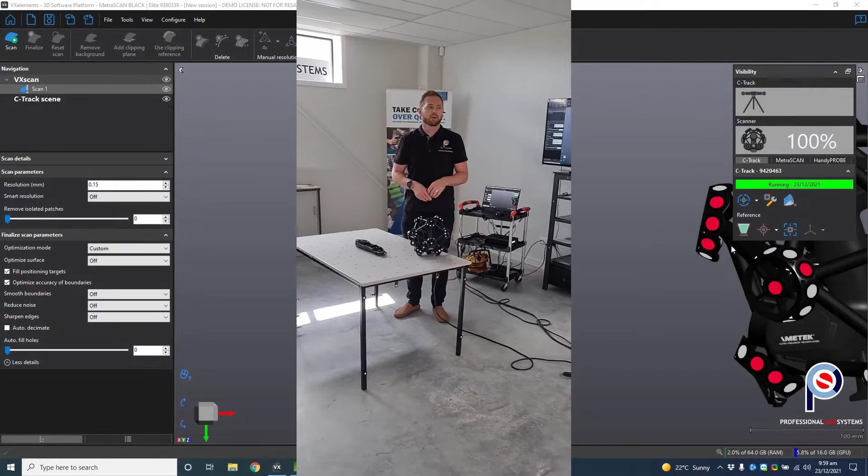Today we're going to show you how to reverse engineer this motorcycle part. It's a very complex shape, nearly impossible to measure with traditional measuring techniques. So we've got Creaform's MetraSCAN, and we're going to show you how to get up and running.

The first thing I need to do before we get started is acquire the targets that I've put on the table, and that will ensure that if this table moves in any way, it's tracking the movement of the part. So we go out into the software.

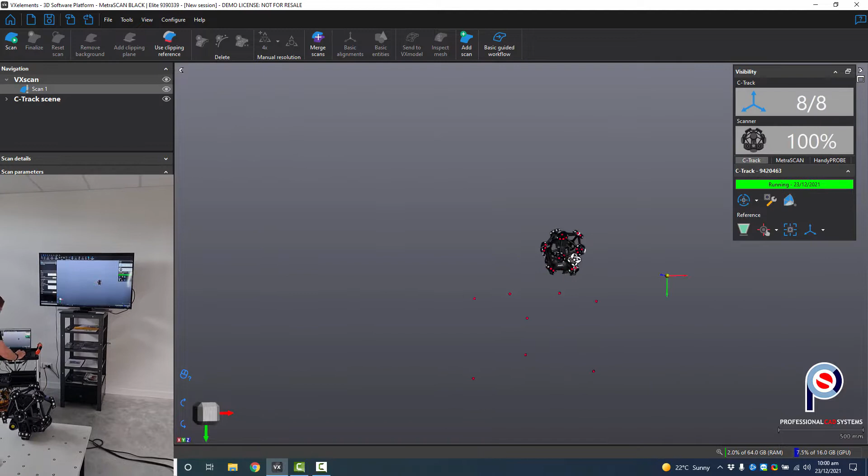I can go and select manual detect, and I just simply drag a selection around those targets and accept it. You can see it's already registered the targets, they're in red. It's already tracking the MetraSCAN. You can see it on the picture. The C-Track's taking track of that.

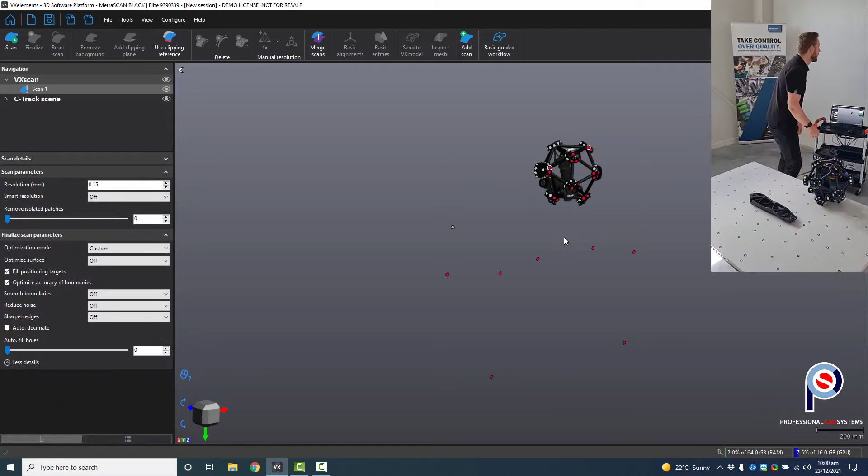So then next what I need to do is determine what resolution I need to use to capture the part. I can go over to the left hand side and change the resolution, maybe to about 0.8.

What's cool with our software is that we can also adjust some settings before even getting started. So I can click on auto decimate, and we'll put large triangles in the large surface areas and keep small triangles in the small or the high detailed areas.

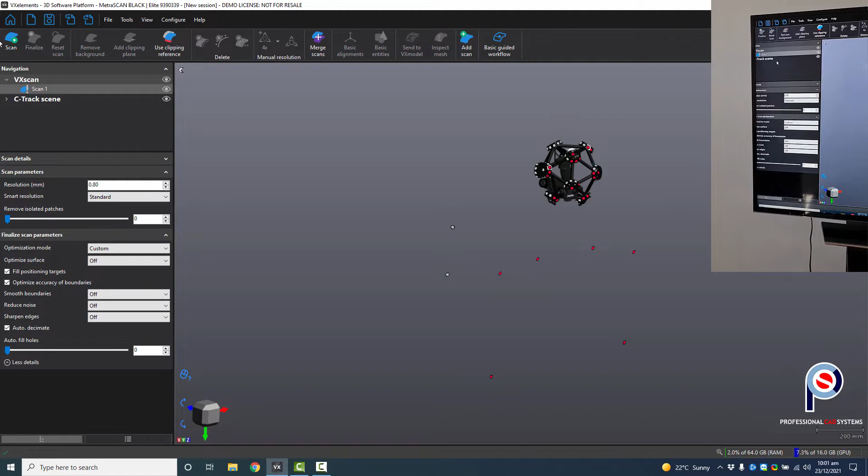We also have a thing called smart resolution. What it will do is just put small triangles on the high detailed areas and use bigger triangles in the larger surface areas. So next what I'm going to do is hit scan.

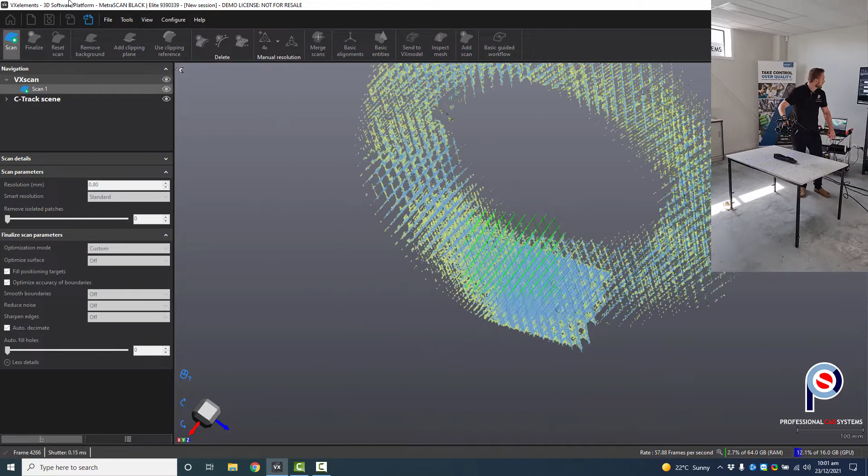Cool. Then I just need to capture a little bit of the table because I basically want to remove that. So just simply scan a bit of that, just enough so I can create a clipping plane.

So next I can go add a clipping plane and just delete that out, because I just don't need it.

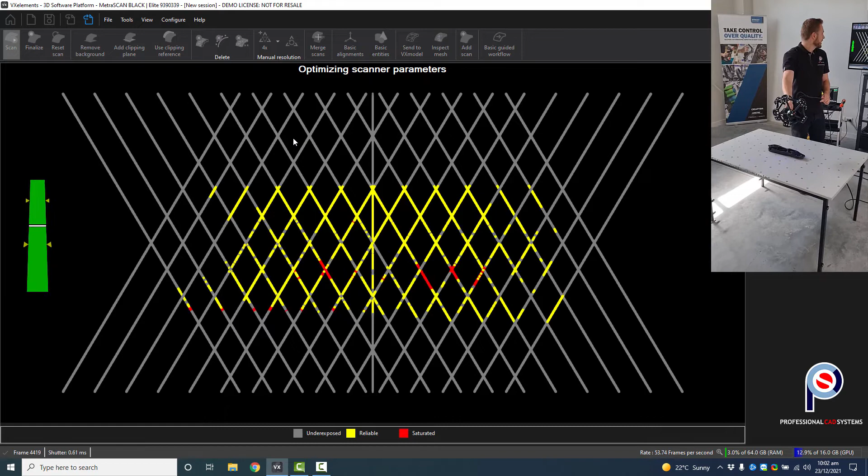The next step is I need to adjust my shutter speed for the laser strength for the part. I've got these multi-function buttons on the back of the scanner. I can hold the tick down, scroll down to auto adjust, accept that, aim it at the object, and it will automatically adjust to suit. Once it's done, it will exit.

So at this point, I'm ready to start scanning. I can hold the trigger down on the front of it. That will start the session. And then tap one more time, and we'll start to collect it.

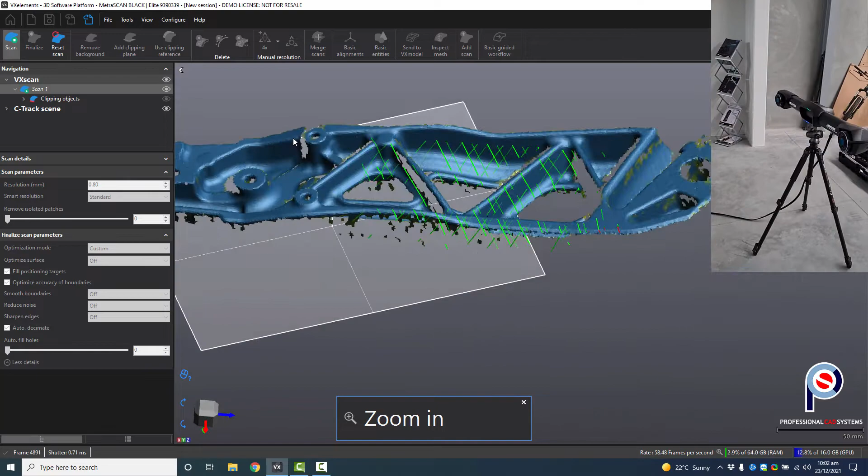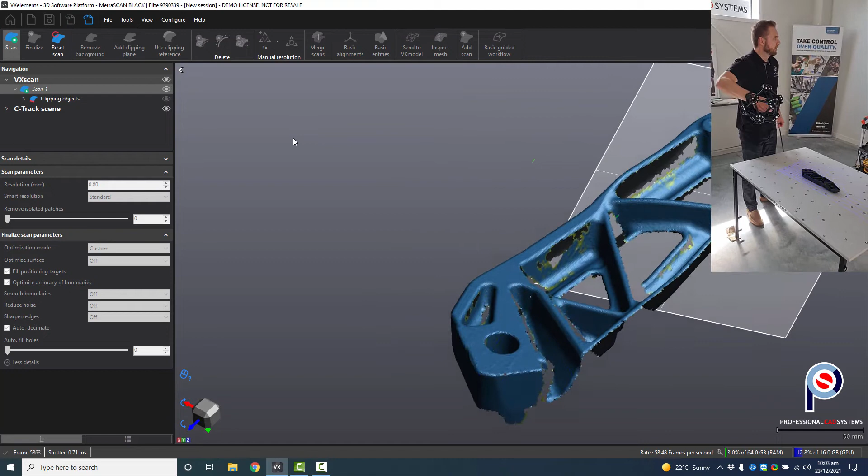It's just like 3D spray painting. As I go over and over it, it just keeps filling in the gaps. What's quite nice is it has a distance meter on the lasers on the screen. So if I get too close, it will go red. Too far away, it will go blue. So you're just aiming to be in the green zone.

But it's a very fast scanner. You can just sweep over and over the part as many times as you like, and it will only ever create a single surface.

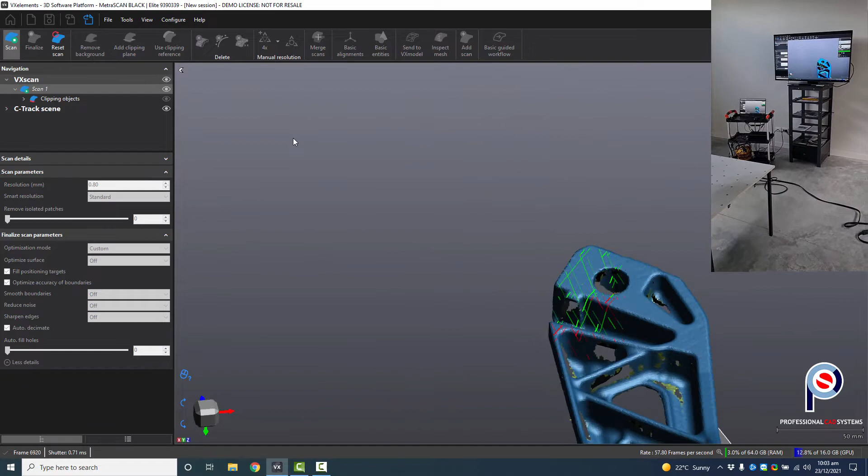If your laser strength isn't quite enough, you can toggle between zooming in and shutter speed. So I can just increase that a little bit more. Then I should be able to capture the surfaces a bit easier now. That's better.

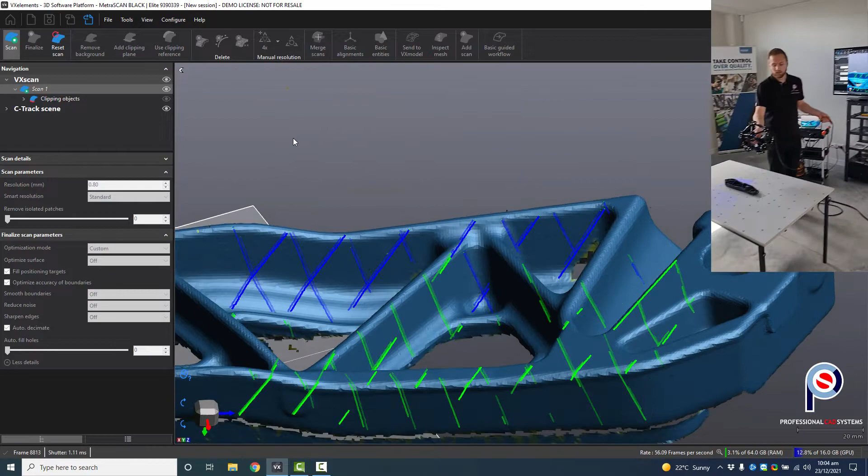So we'll just go around, make sure we haven't missed anywhere. What's also quite nice with the Black Elite model is that we get a single laser. So if I double tap the trigger, it'll go down to a single line, and it just makes it a little bit easier getting into those hard to reach areas.

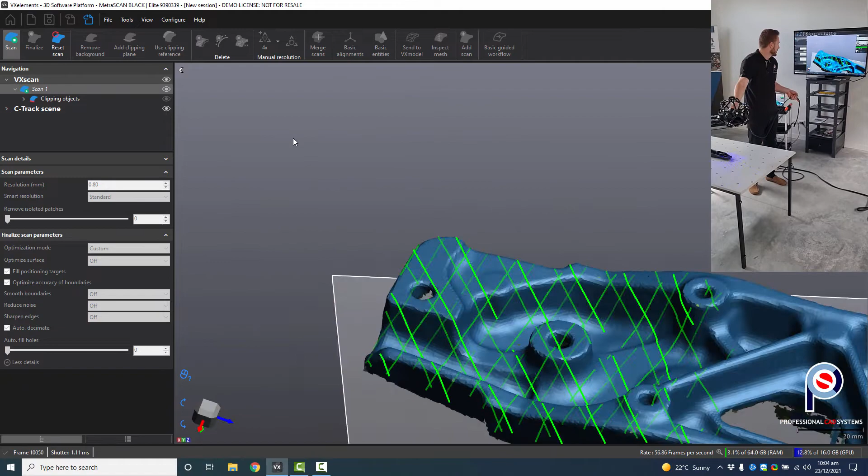Plug in there, you can just flick back to the other laser mode.

Okay, so that's one half done. We can hold the trigger down and press stop.

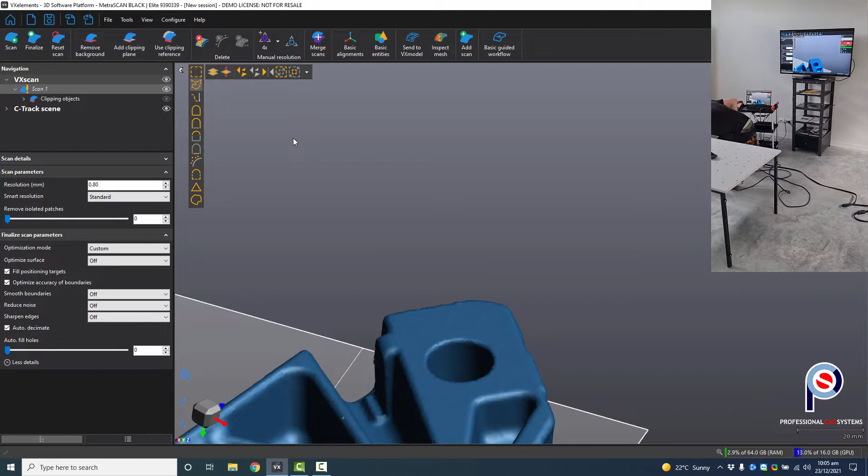Then what you need to do to add the second half is we just click on add a scan, and we can copy the clipping objects. So we'll copy that clipping plane that we created, and then we can use that. It also copies the mesh, so I might delete that.

Hit scan again, and now we just need to turn the part over. Okay, so when you're ready to scan the other half, again you just hold the trigger down, tap the trigger one more time, and just start scanning again.

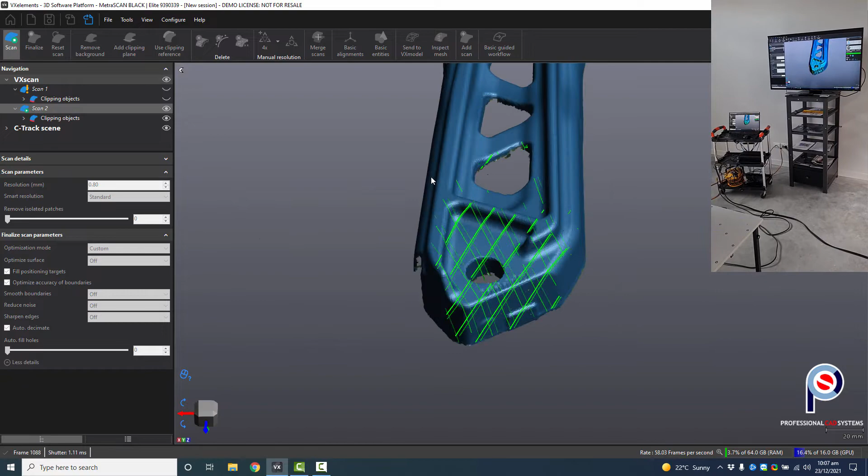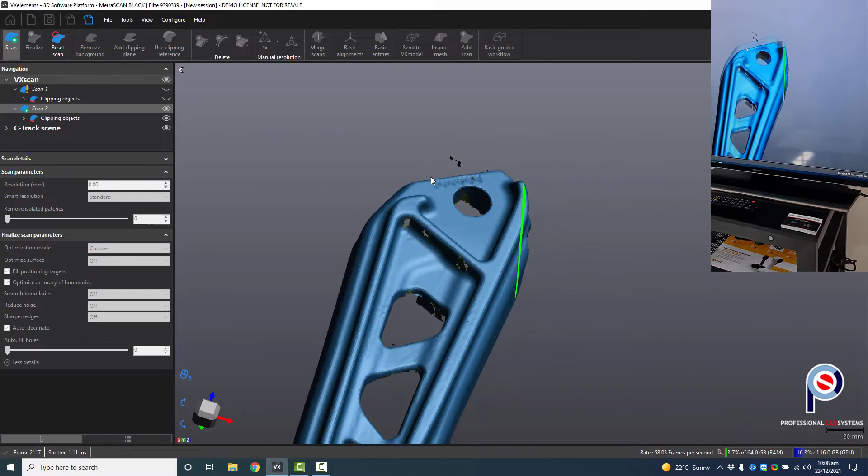And again, I can double tap the trigger just to get into the hard to reach areas. It just gets deep into the holes. So basically it switches to a single lens when you go to the single laser mode.

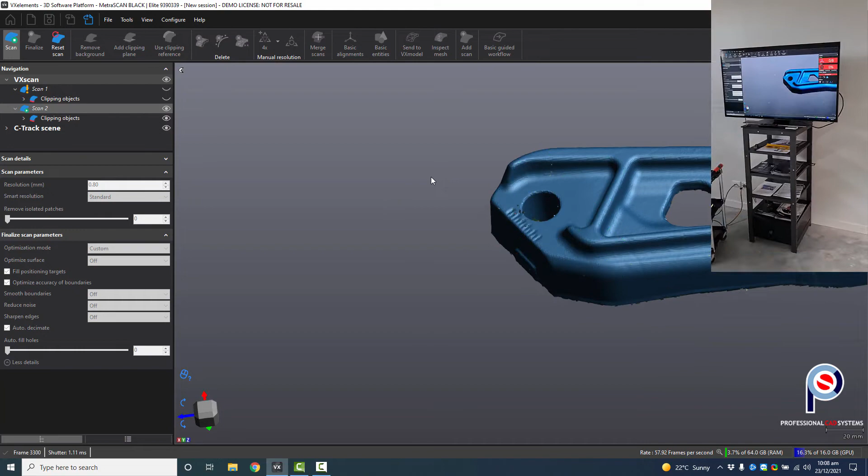Good. So once you're done, you just hold the trigger again, stop the scan, and now we can look at merging the two scans together.

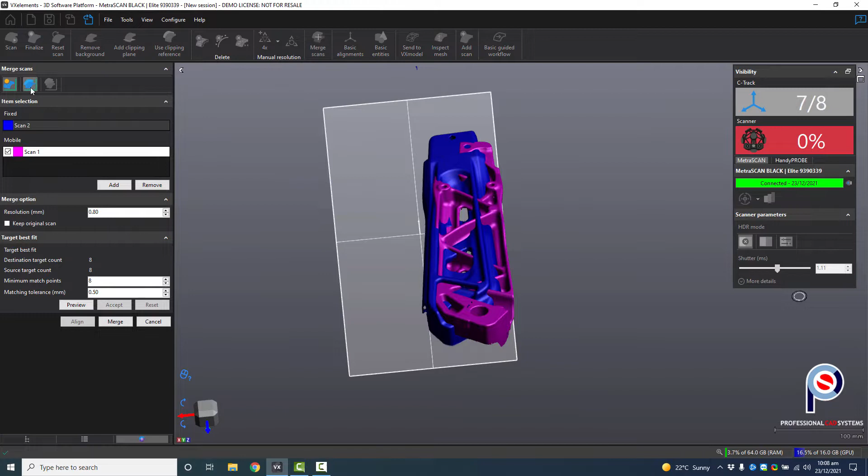So we can go up to merge scan, and we can do a best fit alignment, and we can just click keep the original scans just in case you want them, and we can click best fit automatic alignment, and it should find enough common geometry that it knows the overlapping data.

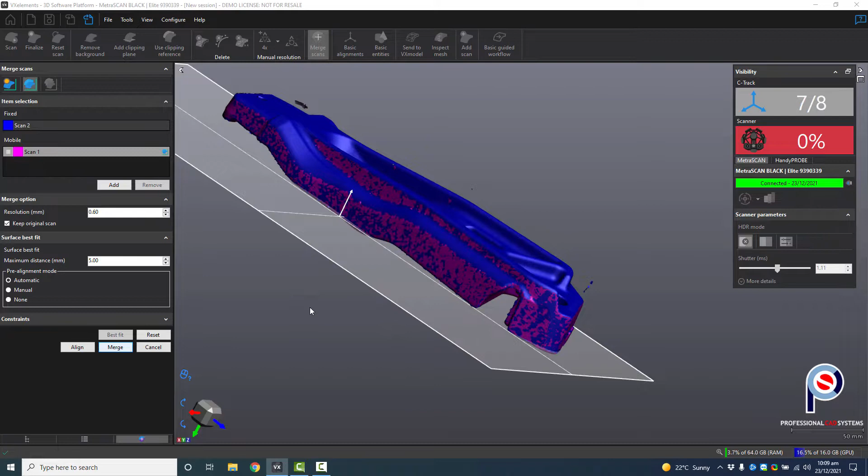And at this point, you're not stuck to using 0.8mm triangles. You can actually increase the resolution even further if you wanted to. So I could say maybe like 0.6. And it will recalculate, redraw on the raw information and reproduce an STL mesh based on that data that we've got in the background.

So now if we turn off scan 2 and scan 1, you can see we're left with that part. If I get the select tool, I can select all I want to keep because there's a little bit of floating data somewhere, like here.

So I select what I want to keep, click on the keep selected delete tool. So keep what you've selected, and it will filter out anything else. And once you're happy, you just click on finalize.

And it's just going through and adding in those post or pre-processes that we put in place, the decimate triangles, any hole filling in and stuff like that. And there's the finished result.

So when you're happy with your information, all you need to do is export to mesh. So we just go File, Export, Mesh.

And then I also like to save the session because that contains all that raw information if you ever want to change the resolution, add more detail.

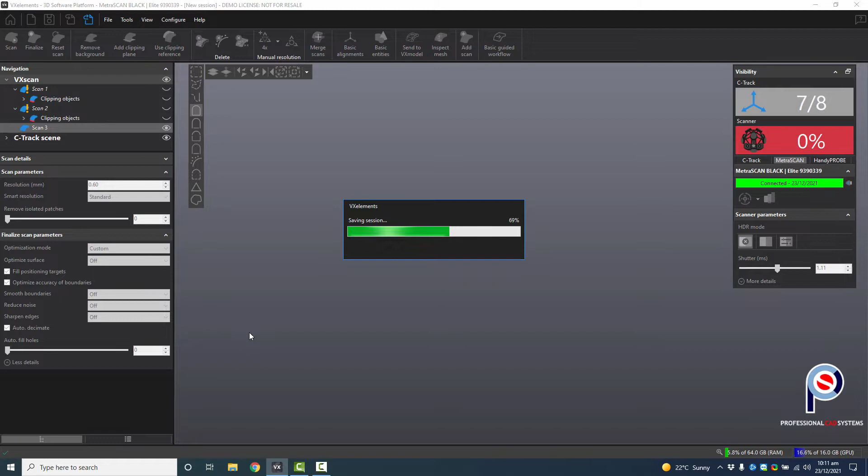And then lastly, before we stop the scan, I'll just show you how it looks, how the triangles are formulated, how they're all stacked together. So you can see the details that we're getting here.

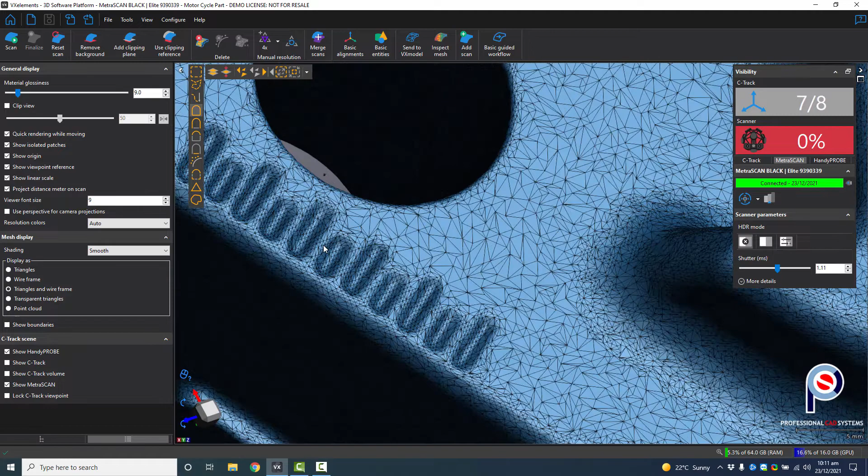If I go to there, I can go triangles and wireframe, and you can see there's the larger triangles. And on the smaller or sharper edges, you can see it's got more triangles, more density. So it really optimizes the mesh for you to export and use for reverse engineering.

Okay, so now that we've finished 3D scanning the motorcycle part, we can now look at VXmodel. So I always like to start a new session, that way you kind of leave the scan session data behind and it will essentially make a smaller file for VXmodel.

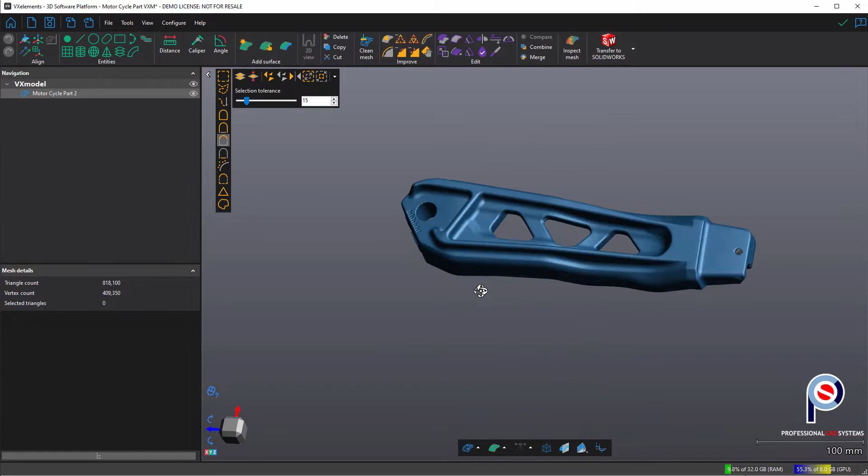So we go to VXmodel in the start menu, then we click on browse and just go and find the STL file that we exported from VXElements. And it will come in just as a mesh, and you can see that it's only VXmodel that's showing, no other scan data. And like I said, it's going to be a smaller file when we hit save.

You'll also notice a completely different interface. So VXmodel's toolbars are activated once you go into VXmodel, and it's a module that works inside of VXElements.

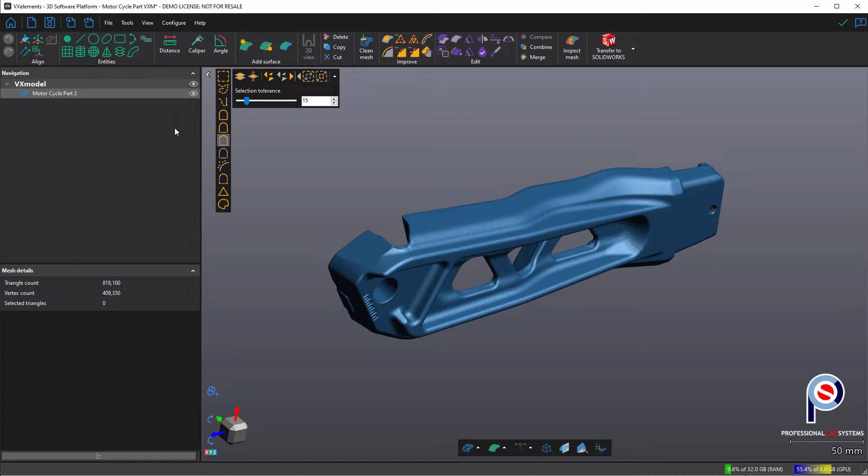So the very first thing I like to do is do an alignment. So we need to create some entities to help us do that alignment.

So I click on add a plane, and typically it will put you into the correct selection tool for the job. So if I hold Control and click on the plane here, you see it automatically finds whatever is a plane and gives you basically some feedback on how well it's fitted.

You can change the error distribution if you want to just check and see if it's within 0.1 of a mil, for example. That's doable, and we can go OK.

Next, what I want to do is create a cylinder. So I'm going to click on cylinder here. I'm going to hold Control and click on the cylinder, and you can see it's gone ahead and selected that. And again, I can change my error distribution just to see how well it's fitted.

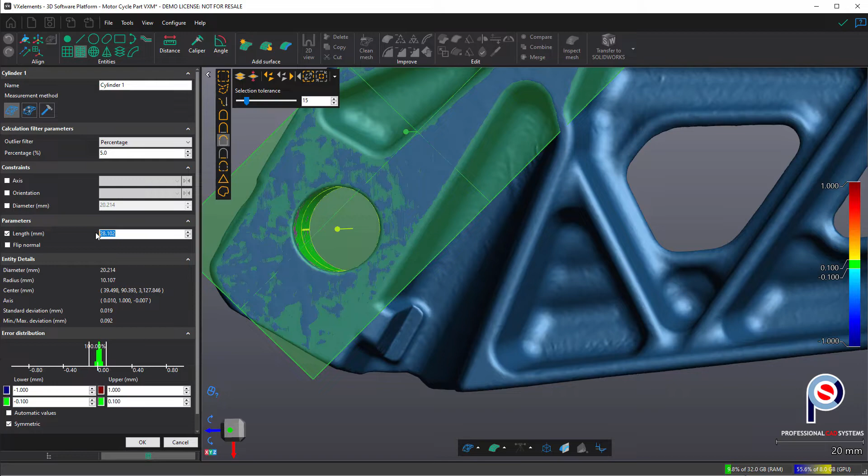Looks pretty good. But then in addition to that, I can expand the parameters and the constraints, and I can change the length of it because I want to overextend this to basically cut it away from the main body eventually. So I'm going to go 35 millimeters for the length of it, so you can see it's overextended.

And for the diameter, if you're reverse engineering this part, you may want to say that that's actually 20 millimeters, a nice round number.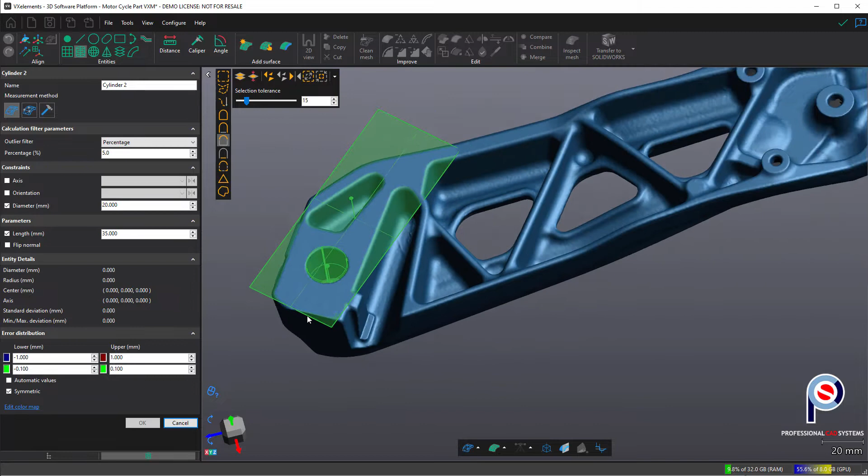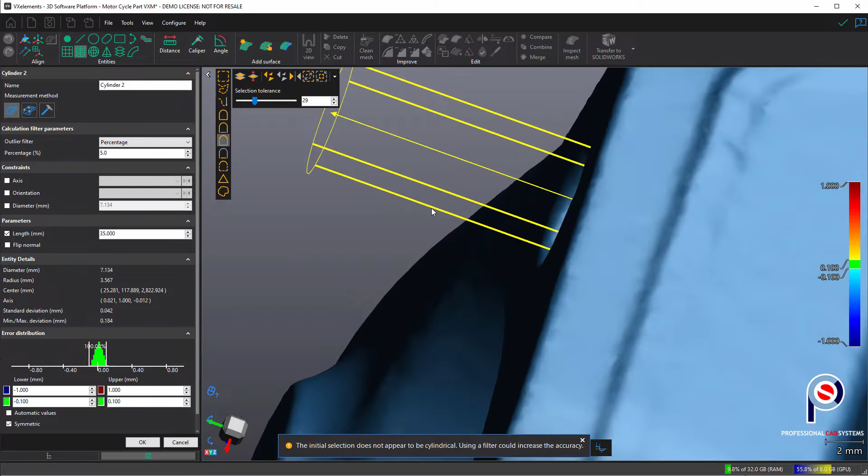Okay, let's do another cylinder on this one over here. I'm going to hold Control again and click, and increase the selection tolerance. It's looking a bit wonky, partially because I still have the same 20mm diameter selected, so let's uncheck that. I need to select through the cylinder as well since I've got data on both sides, so that's now selecting through nicely. Sometimes I switch to brush mode to pick up a bit more data, just so it selects well.

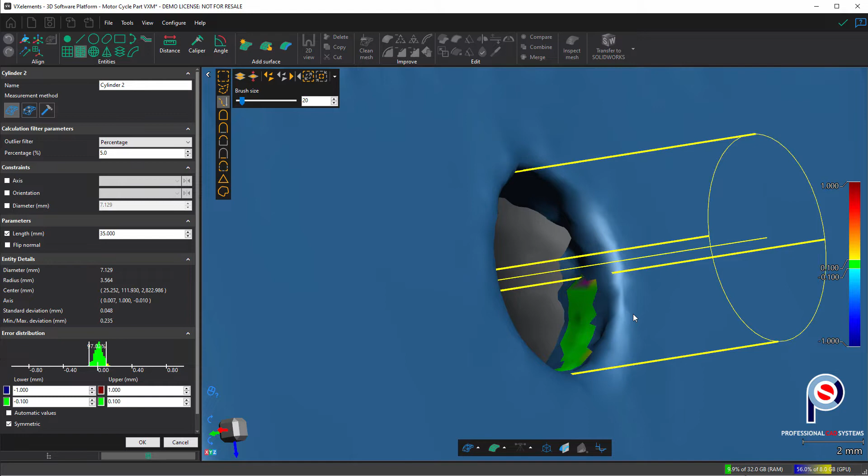Then I can set the diameter to 7mm. I don't mind that it's overextending itself, that's perfectly fine. So we go OK, and cancel because we're happy with the cylinders we have.

Next I need to do the alignment. Go to manual alignment, choose plane 1 as X and Z. I'll use cylinder 1 as my Y-axis, and cylinder 2 as either my X or Z axis—it doesn't matter too much, but you'll know what you want. Then OK.

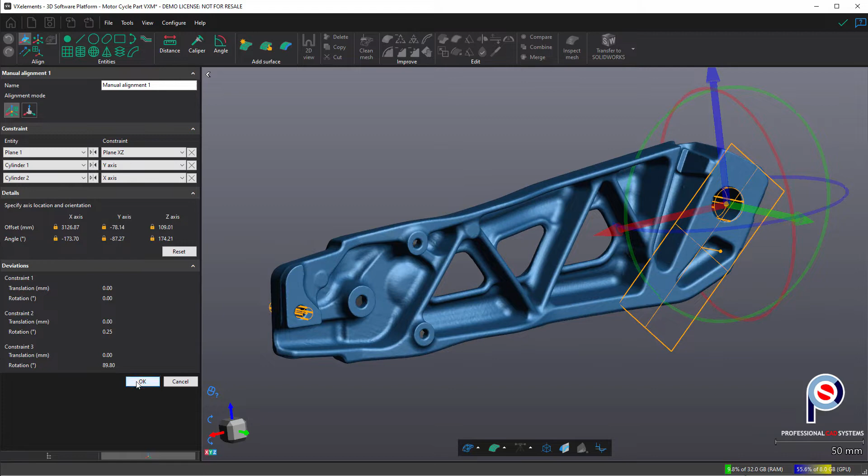Once that's done, we can now extract these other mounting points. I need to create some planes, so I'm going to hold Control and click on those planes. Hold Control, click, and keep holding Control and clicking a few more times, or you can increase the selection tolerance to select a bit more, then OK.

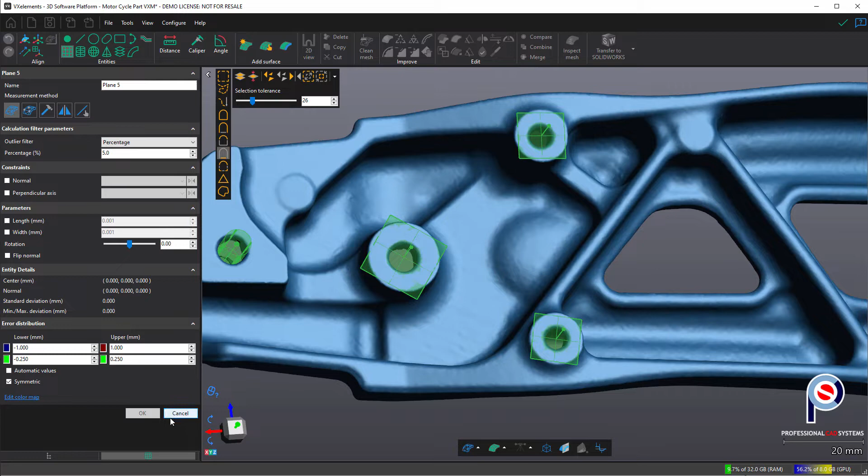You don't have to cancel the menu, you can go straight to the Circle Tool, and I'll select my second plane as my constraining plane. I'm already in the right selection tool, but I'll increase the selection tolerance a little, then hold Control and click on that internal cylinder, set the diameter to 7mm as well, and press OK.

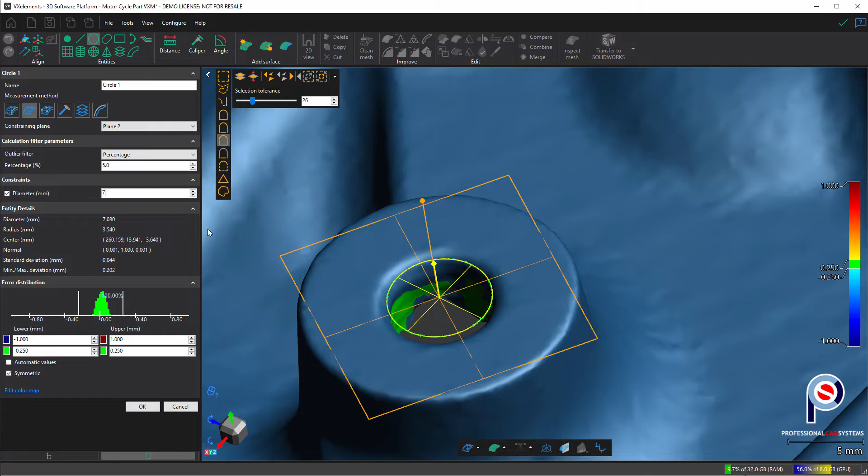Switch to the next plane, plane 3, hold Control and click on the circle on the inside. You can see it's completely off now because the diameter is different, so uncheck the diameter, recheck it, and set it to 5, then OK.

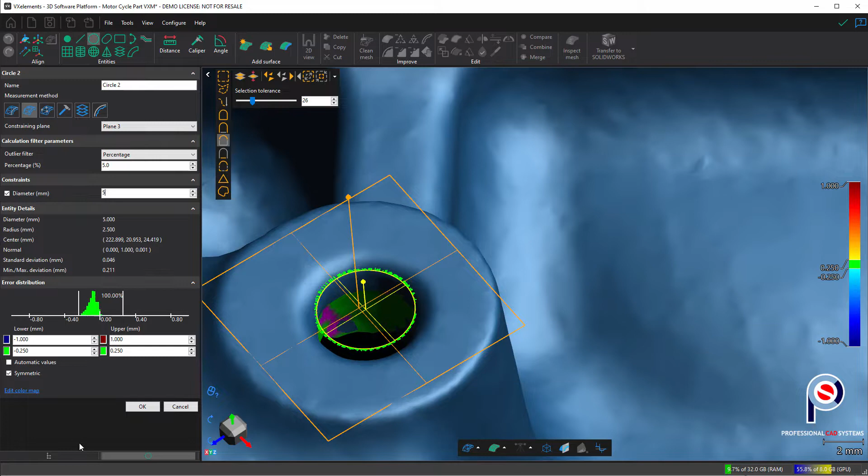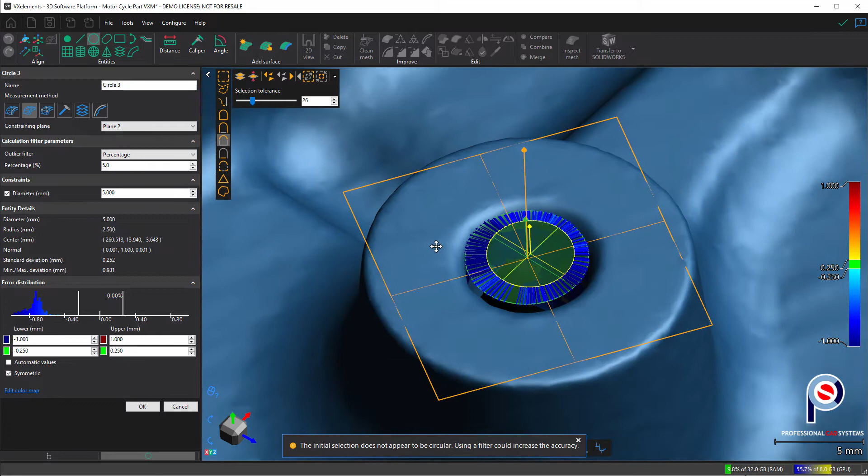Switch to the next plane, plane 4, hold Control and click—looks a bit funny, so I need to make sure I have the right plane selected, plane 2. Let me deselect and try that selection again. Oh, I've already done this one, sorry, got myself confused. So I go to plane 4, deselect the triangles, and just click on the correct hole. That's better and makes more sense.

Okay, so we now have those mounting points. We can now remove basically these internal holes because we need to make a solid body out of the shape, and we want to give it cleaner, machinable surfaces.

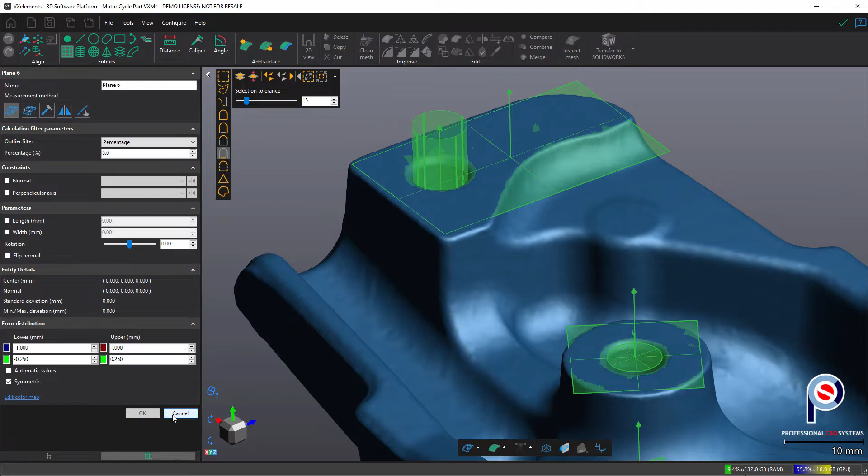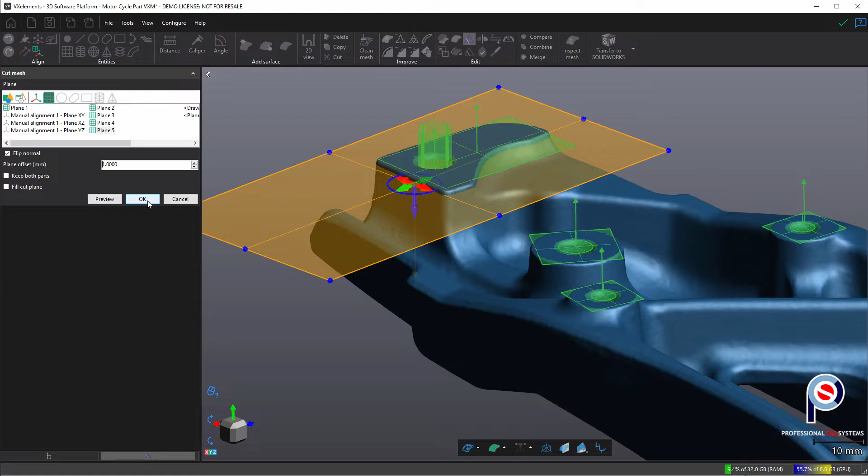First I'm going to create a plane and add that there, then select OK. Now we go to cut plane and select plane number 5, and just bring that back. It may cut this plane as well, I don't know—no, it's at a different height, so this is just an individual cut. We're not going to keep both parts, we'll flip the normal so it points downwards, and cut it down 1 millimeter. I don't want to fill the cut plane, we're just going to cut only. Okay, so we've done that.

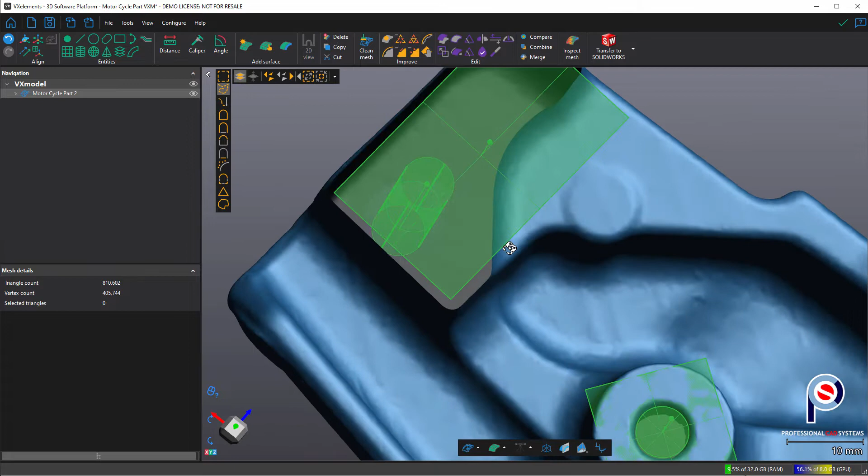We can also now delete the circle here, so I'll get the selection tool and select that and get rid of it, including that cylinder there. Essentially we already have a cylinder we can now remove from the solid body we're going to create. While we're at it, I might as well hit hole fill and flat hole fill this hole here.

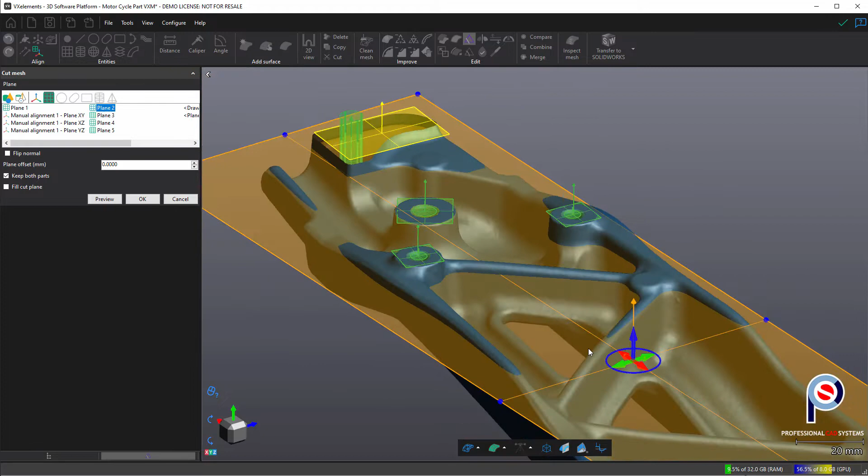Okay, that's good. We now need to cut the next faces, so we go cut again. I'm going to select plane 2, and again adjust the cutting plane, making it smaller so we don't cut anything else apart from the surface we want. Flip the normal, don't keep both parts, 1 millimeter cut.

And then lastly, we're going to do both of these planes. They actually look like they're at the same height, so we might even just be able to create one plane going across both sides and increase the selection. Yeah, this was obviously meant to be on the same plane, so we can go OK, cancel.

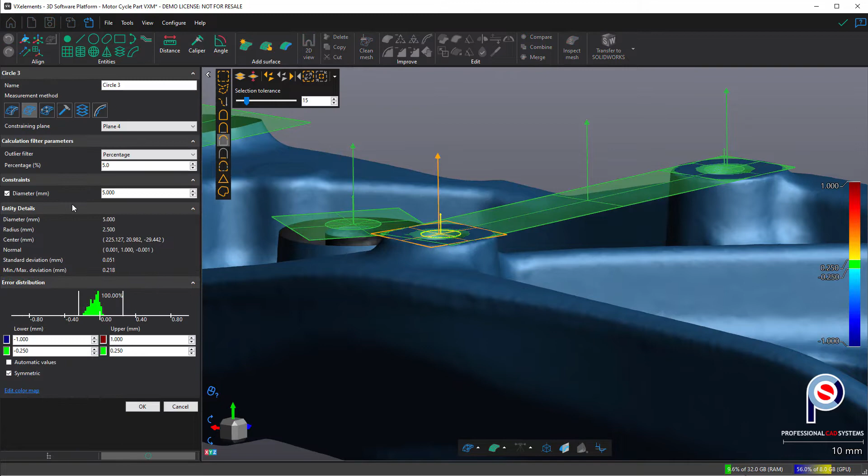Technically we might be able to go to those previous circles, like circle 2 here, right click and edit, and just change that constraining plane to the last plane. I want them both to share plane 6 for CAD, and then edit circle 3, and we want it to share plane 6.

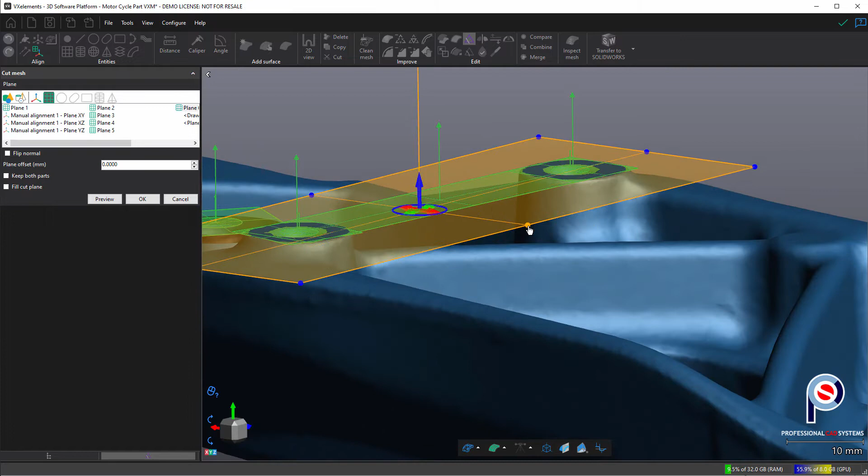Now that the holes have been sorted, we can go to cut. Use plane 6, don't want to keep both parts, and we want to cut through only the highest point and nothing else. Flip the normal, increase the offset 1 millimeter, and then preview.

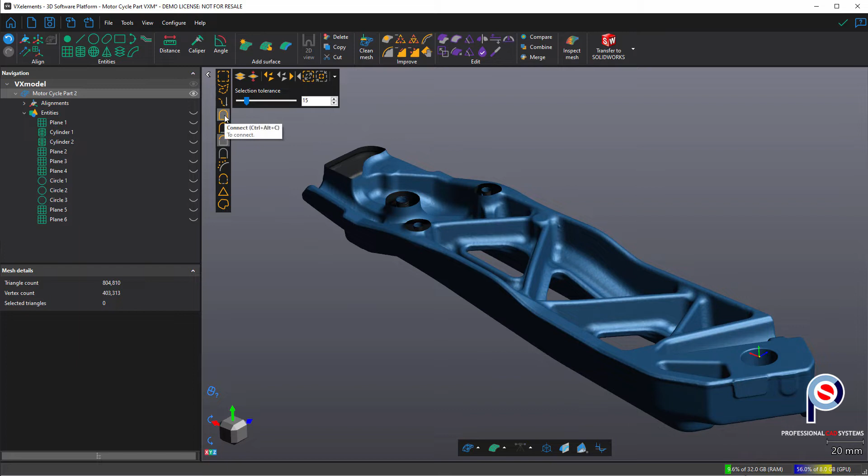So now, why don't we just show only the mesh for a moment. Right click, show only, selected. I'm going to use the Connect Selection tool, hold Control and click on what I want to keep. Then I'll click on the inverse selection and delete these holes now, because we've already extracted that info. Then delete.

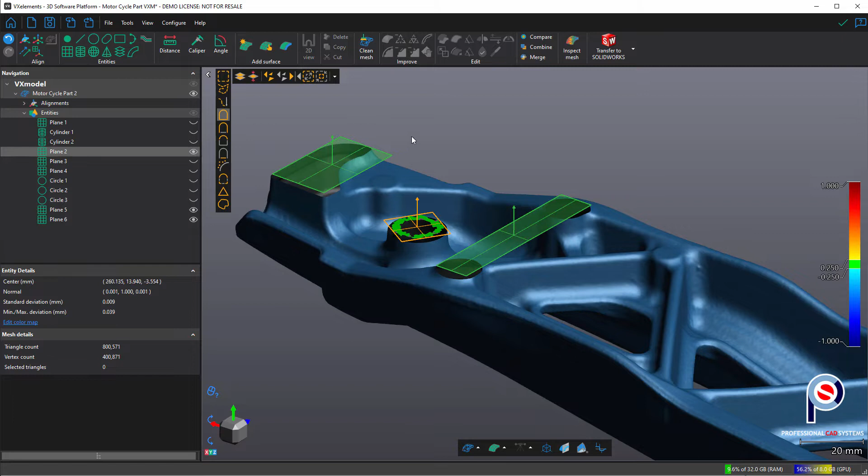Then we can bring back the planes that we need. So we wanted plane 6, plane 5, and I think plane 2. Yep, so those three planes we want to see, because we need to now extrude these boundaries up using that plane.

We're going to go to extrude boundary. I'm going to select the boundary, and say which plane I'm going to use — plane 5 — and we're going to do it by 1mm more, going even further than the original plane, because we're going to cut it off and make a sharp cut in SolidWorks.

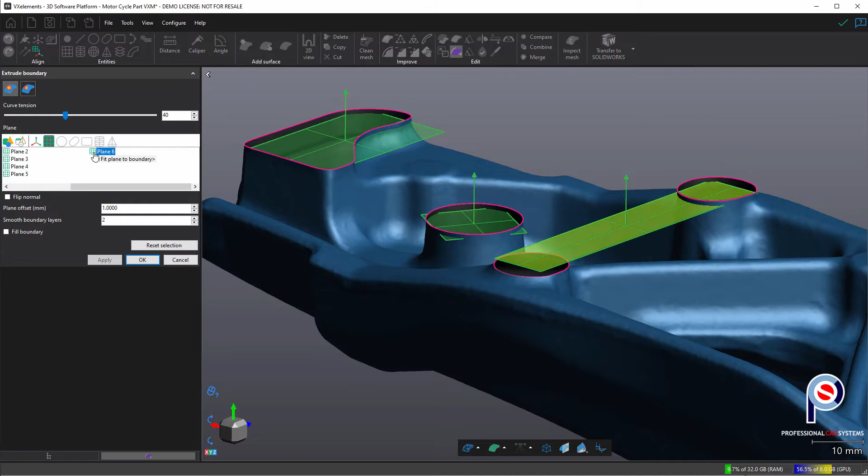Now we're going to do the same for the next boundary, which was plane 2. Apply, and then plane 6, and choose which boundaries. We'll do one by one, so apply, then choose 6 again, and apply.

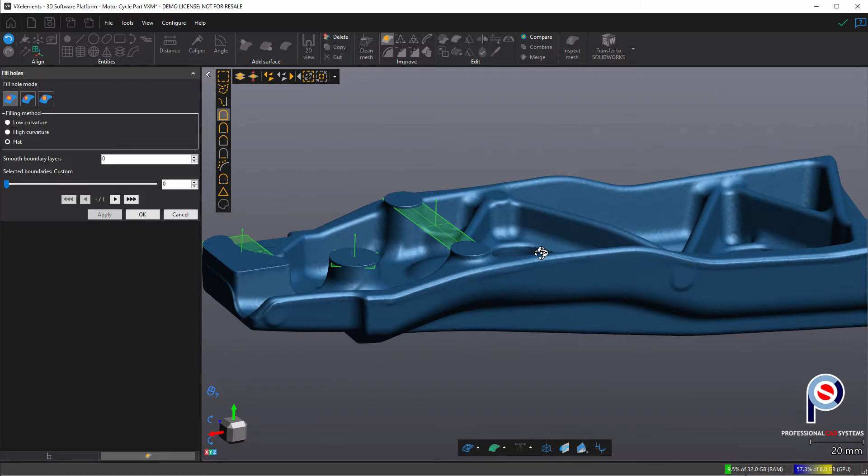Okay, so now we can go to hole fill, just flat hole fill, and click on each of these holes to fill them in. That's looking good, we'll just leave these ones over here — I think that would be fine. We could attempt to make that plane a nice machine plane, but it might get tricky where it blends in here, so we might just leave that for now.

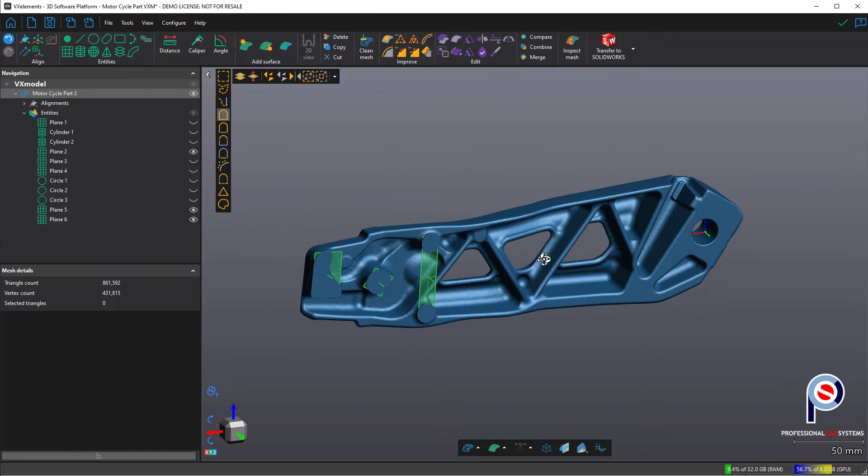Once we've done that, we can go to clean mesh and check if there are any irregularities with the mesh, hit apply, and we'll fix anything that may be wrong with it, then OK.

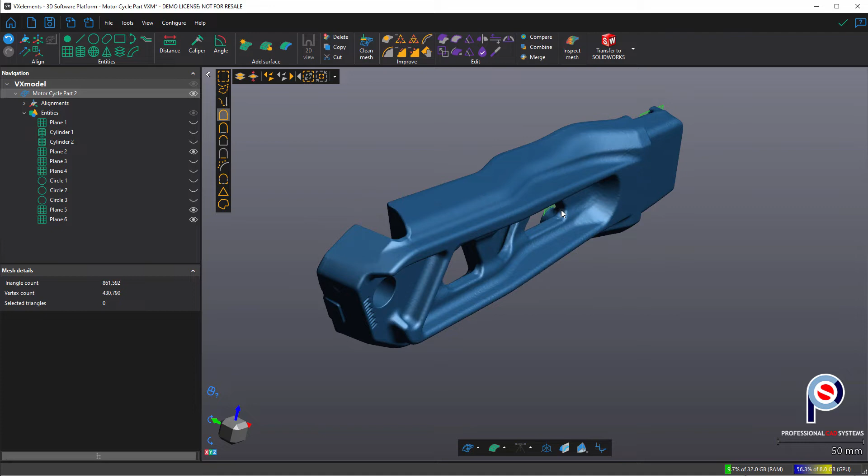Lastly, we can shrink wrap NURB or CAD surfaces around the scan data. We have a tool called the Auto Surface tool, and I'm going to set that to about 8,000 patches with 16 control points, and let's go preview. I'll just pause for this part to save some time.

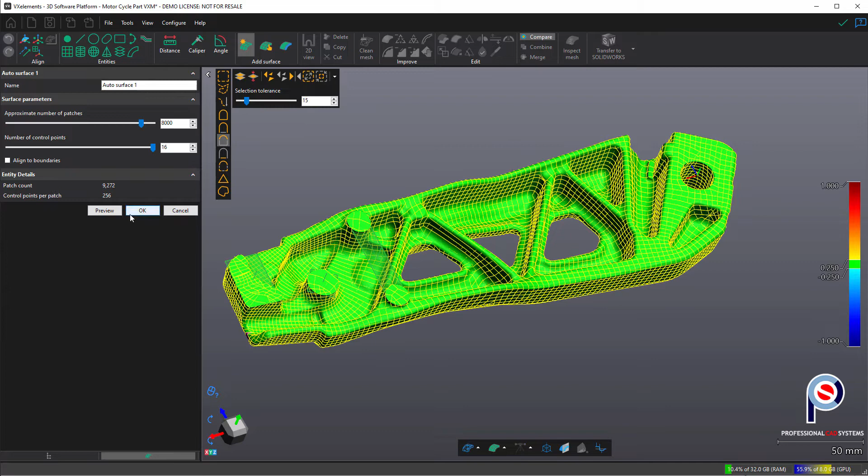Okay, so the auto surface is finished, and we can compare the scan data to the auto surface to see how accurately it's fitted. If I just turn off the — well, no, that's fine for now. We can change the way it colors, but we'll do that next, so we'll go OK.

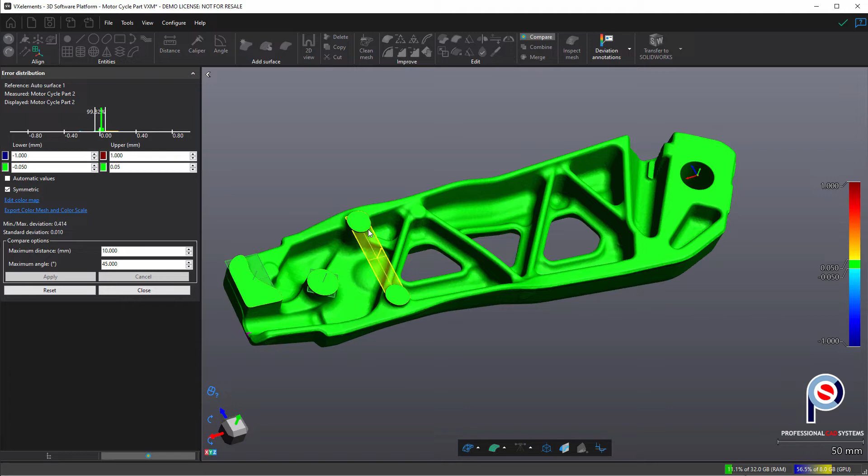Now that it's created, we can go compare to auto surface, turn the visibility of the auto surface off for a moment, and set our tolerances. You might say you want it within 5 micron or 50 micron — it's all green there, so we'll try 0.05, and you can see it's still very accurately fitted. Let's say 10 micron. If you want to do any checks, you can do annotations to see how closely fitting that auto surface is — it's the fastest and easiest way to get a CAD surface for use in SolidWorks.

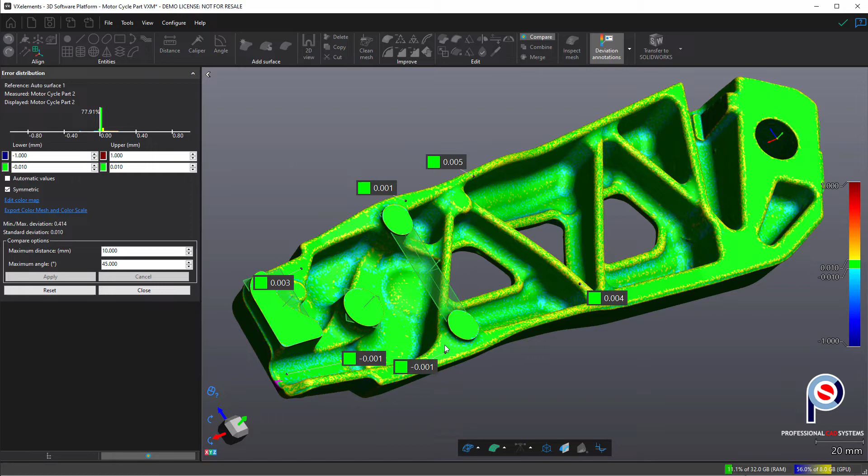So once we're happy with that, we can start transferring all of our entities over to SolidWorks. Just turn on everything. Some of these planes I don't actually need — plane 3 and 4 we don't need, because we started to use 6. So I'll just select what entities I need to transfer over to SolidWorks. I've selected those, and just click on transfer.

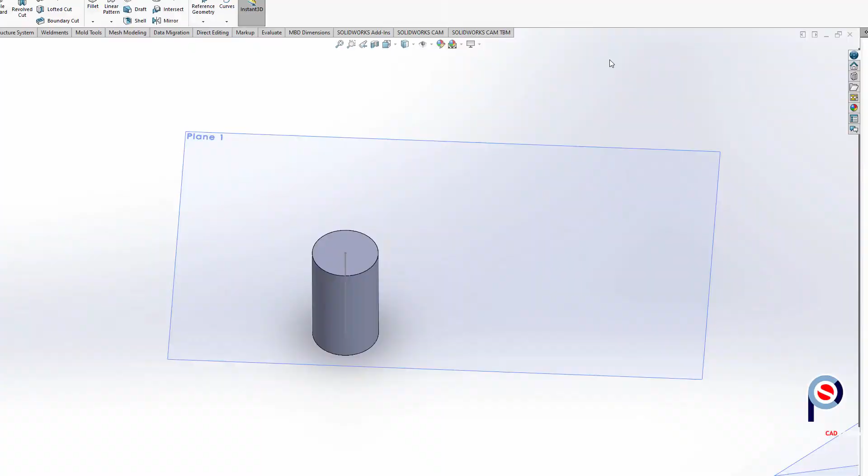Okay, so that's done. They just come through as actual cylinders in SolidWorks and circles.

Next we go back to VXmodel, click on the auto surface, and this takes a bit more time, so I'll probably pause the video just for time's sake, and click transfer to SolidWorks. Just so you know, you can also transfer to Inventor and Solid Edge.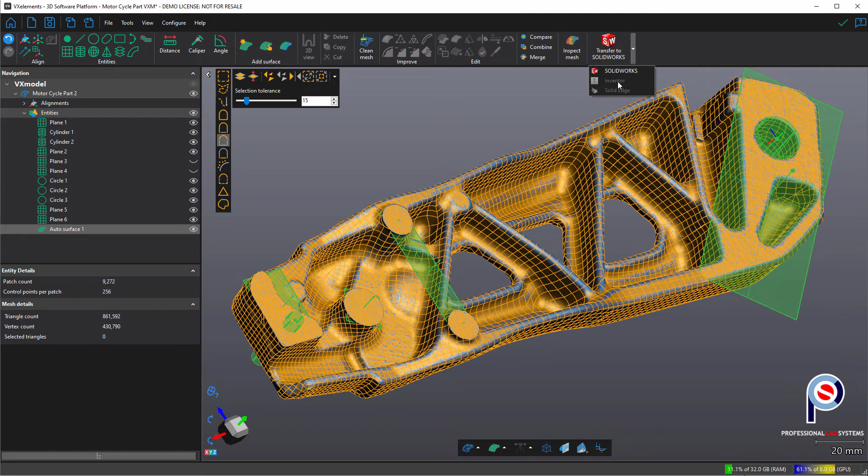Okay, so we've successfully imported our auto surface into SolidWorks. We're now going to just cut away the cylinders and create those machine surfaces. First we'll select on plane number 2, get my sketch tools, and just do a little rectangle.

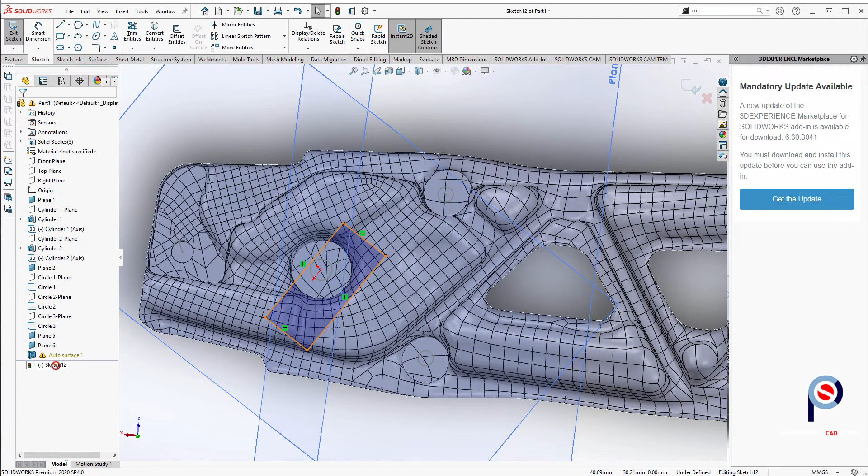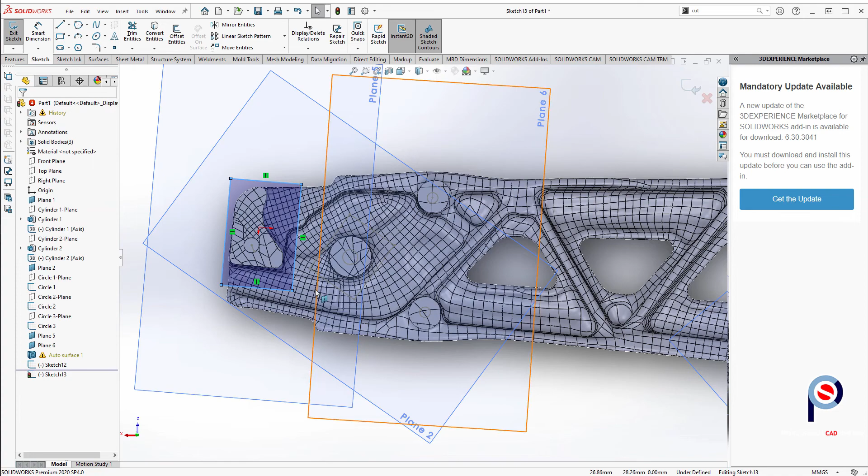Once that's done, I could just jump back into that sketch, just extrude that out. Okay, exit that. Next I'm going to click on plane number 5, and then again enter into a new sketch. Okay, accept that. And then we're going to exit that sketch.

Okay, and then we're going to select plane number 6, new sketch, and then just do a rectangle around that surface. The warnings that are coming up are just a little problem with the auto surface, but hopefully we can resolve that.

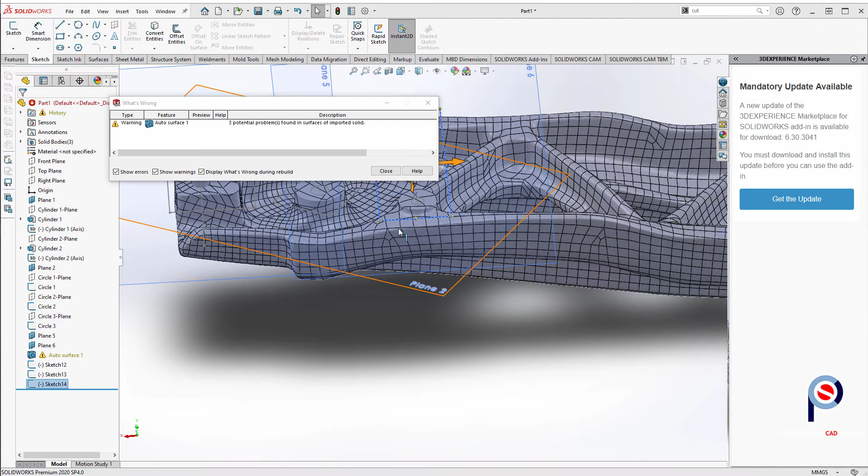Okay, so now that that's done, we can now do some extrude cuts. So we'll go to features, we'll go extruded cut, select on that, go the opposite way, and accept.

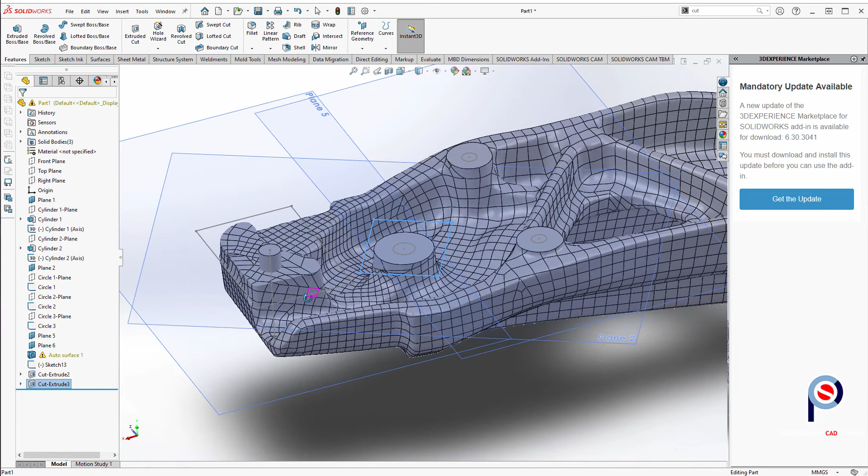Okay, so you can see we've given it a real nice clean finish, and then we just repeat the process. So extrude cut again, make sure it goes the right way, accept. Okay, so one last plane to extrude.

Okay, so now that that's done, we can basically extrude our circles into the body. We could also do an extrude cut, and just select each of these sketches. Hopefully we can do them all at once, maybe not, and I might just set that to 5 millimeters, and that should be fine. Accept.

Okay, so that worked, and then we just repeat the process on the next 2 holes. Okay, and then we can accept that too. Okay, last one to do. And accept.

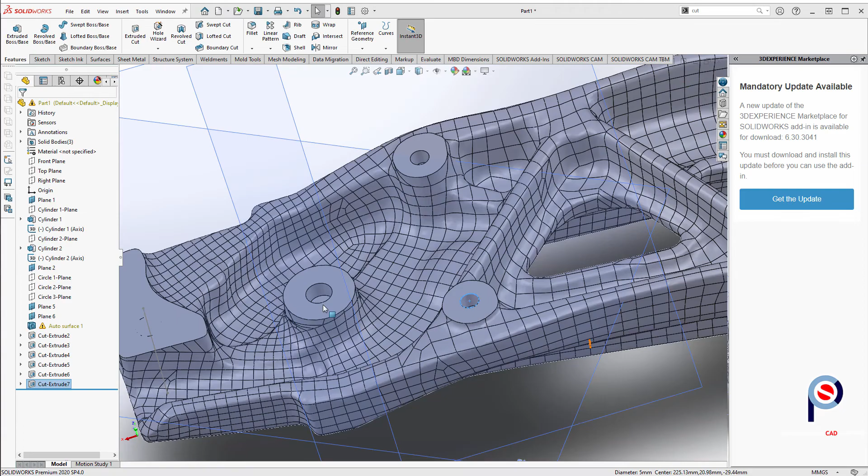Okay, so it looks like one of the cylinders isn't quite long enough. So what we can do is just find that cylinder. Cylinder 2, we'll delete it. And we just say yep.

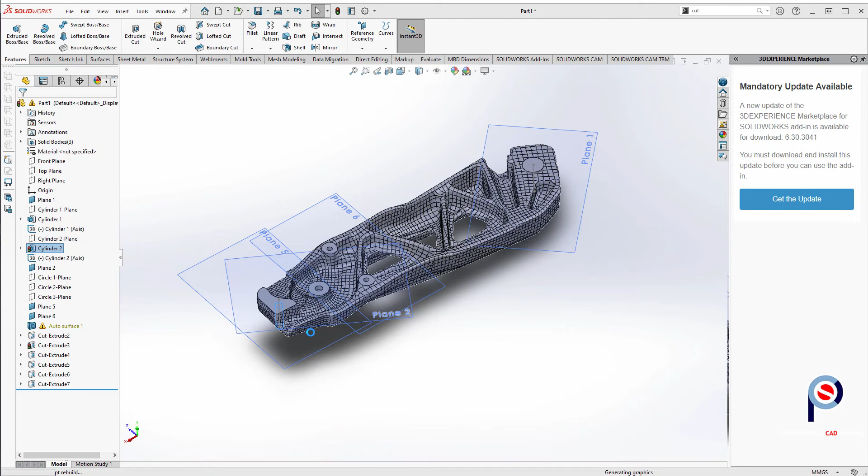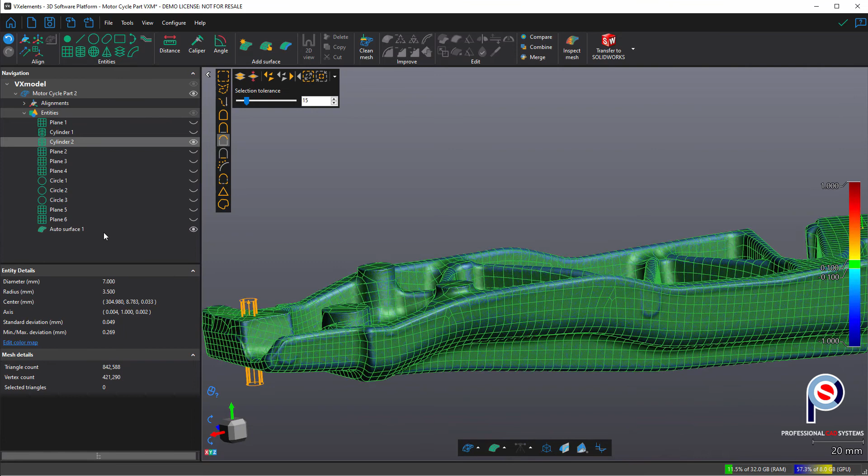Jump back into auto surface. We might try repair that one while we wait, but anyway, we'll jump back into VXmodel, and then we'll turn on that cylinder 2, and we just want to make sure that it's long enough, I guess, which it does look like, but maybe since we did that extrude cut, we chopped off the top of the cylinder. So why don't we just send that back over to SolidWorks.

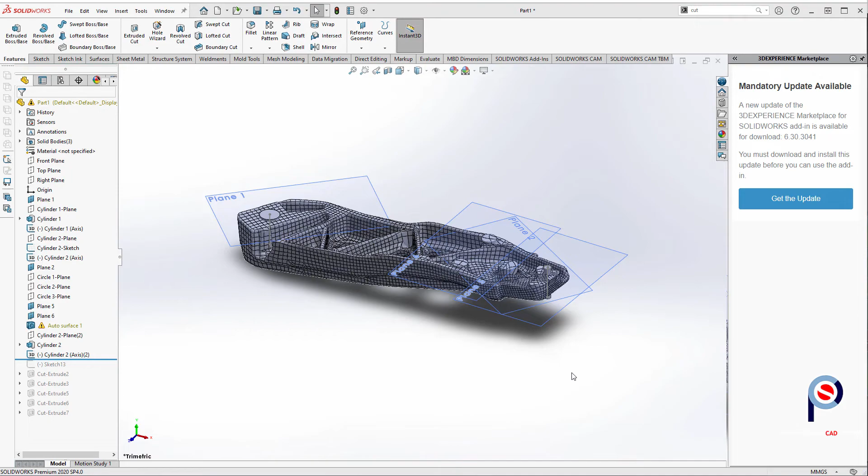Okay, so we right click on that, and we go transfer to SolidWorks, and it just re-imports it back in. So we've re-imported that cylinder, and now we can remove it from the solid body. So we go insert, and we go to features, and we go to combine. The main body is the auto surface, and we want to subtract these, and make sure you select subtract, and then OK.

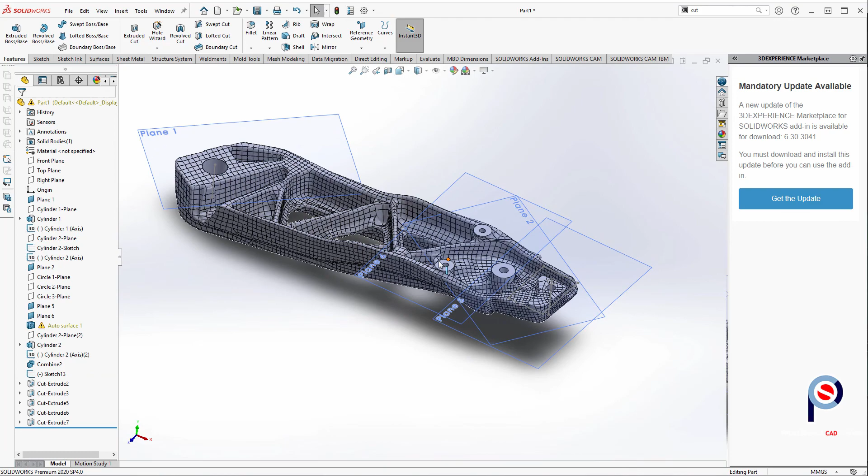Okay, so we've now finished doing that, and then we can right click and just roll to the end, and then you can see that our cuts on the machine surfaces are back.

One of the cuts failed, so that's probably because I deleted that cylinder. So we can easily just do another extrude cut on that and just make sure it goes the right way, and accept.

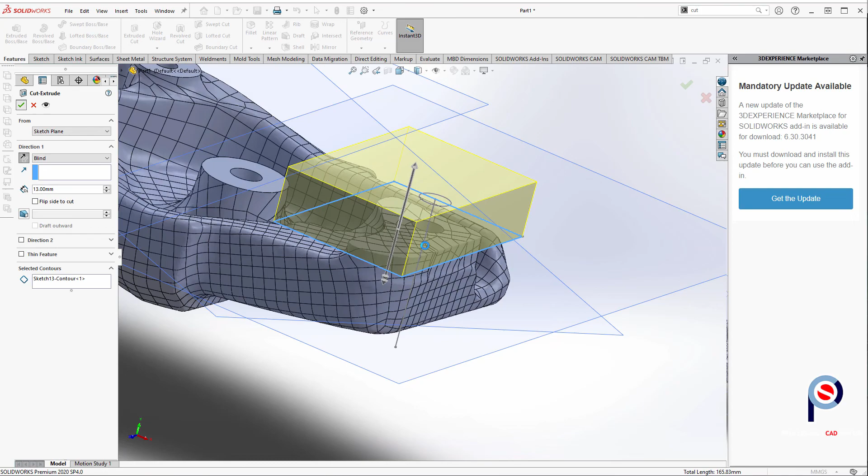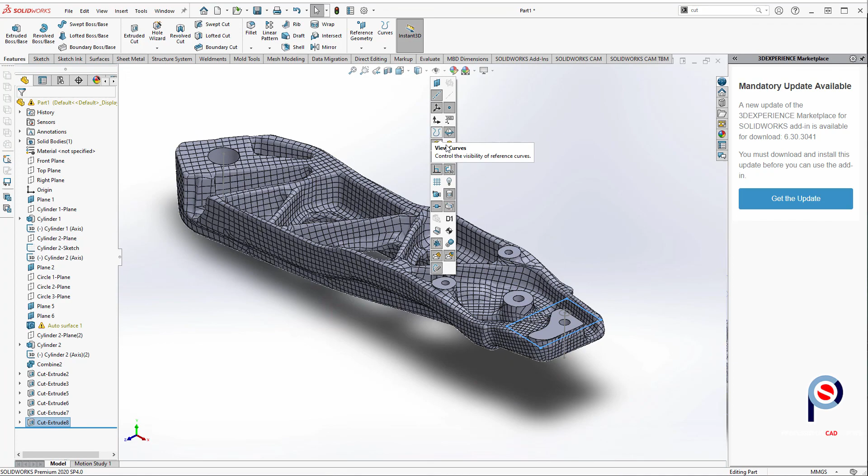Okay, so that's now cut and your part has been completed. So we can just now turn off everything we don't want to see, so we can just turn off the visibility of the planes basically, and any sketches that there might be.

And if we turn off the edges just to have a look at it, you can see we've got that part now into SolidWorks with properly machined cut holes. Yeah, ready to use and machine from.